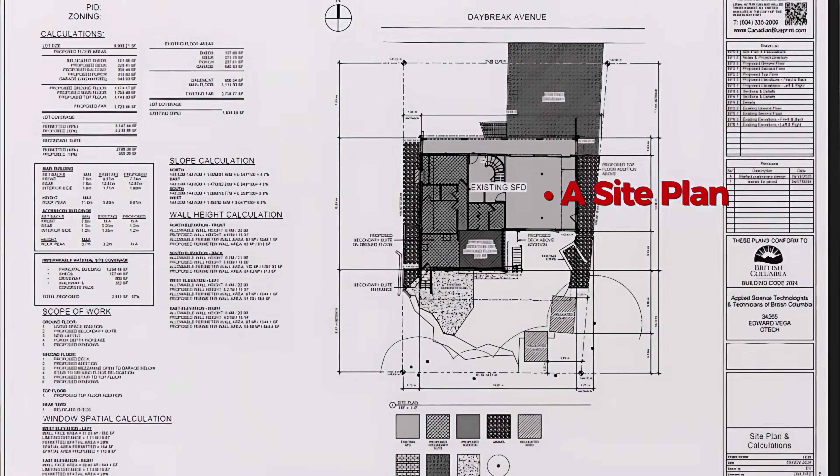A question you may often have is what happens behind the scenes. We'll review the original drawings, which include important details like a site plan, which gives us your current setback, building calculations, which let us know your home's lot coverage and square footage.

Please note that the maximum allowable square footage of today may not be the one that was approved back in the day. Therefore, if you're planning to add some square footage based on the previous calculation, that may not always be possible. Next, we'll review the land title.

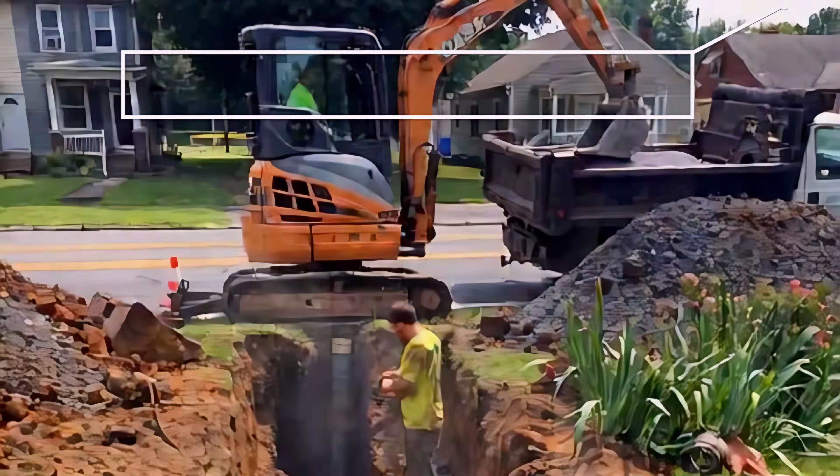This gives us details such as if your property has a right-of-way or covenants. To explain what a right-of-way means, there may be a section in your property that even though the city recognizes it's your property, you may not be allowed to build over that area. Often a right-of-way is used to grant access to essential services like plumbing or utilities that the city may need to access in case of an emergency. So while it's your property, certain restrictions apply, and construction over these areas are typically prohibited.

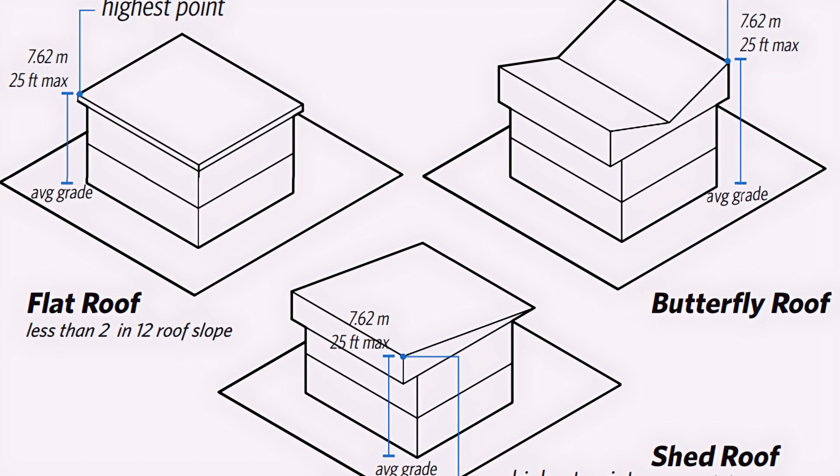A covenant is a legal agreement or restriction placed by the property owner or the city or another authority. It can limit how the land can be used or developed. For example, you may not be allowed to build over a certain height, specific architectural styles or materials may be required, or you may be restricted from subdividing the property.

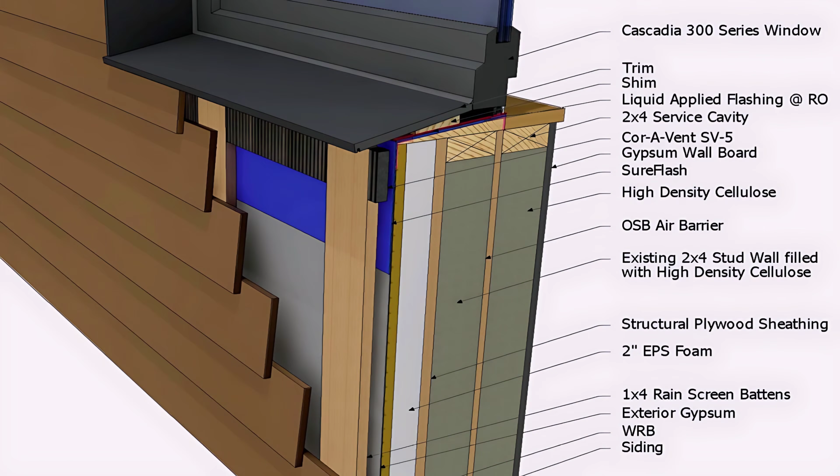Covenants are typically in place to protect aspects of the land or neighborhood, like environmental factors or preserving a specific aesthetic. Once we put all this information together, it helps us determine if the proposal would comply with local zoning bylaws. We also check against the BC Building Code to make sure that everything meets safety and construction standards.

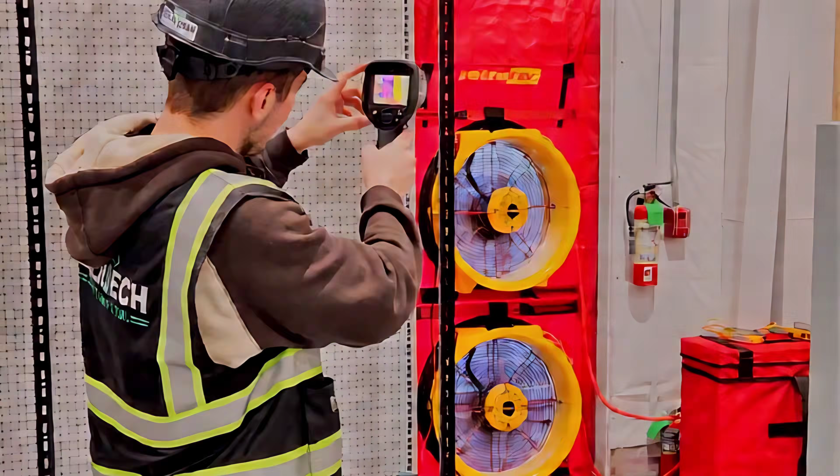We look at the construction assemblies for energy efficiency and fire separation. One interesting thing that I want to mention is the BC Energy Step Code, which came into effect by the end of 2018. This act requires you to bring on board an energy advisor to evaluate your project and make sure it meets the new energy efficiency standards.

In my experience, this often means upgrading things like wall assemblies, window types, and your mechanical system. This is to reduce your home energy consumption. This is very similar to what BC did with the BC carbon tax. Just as BC wants to get rid of gas due to its high carbon emissions, they also want to stop allowing homes to be built that waste too much energy because of poor design or workmanship.

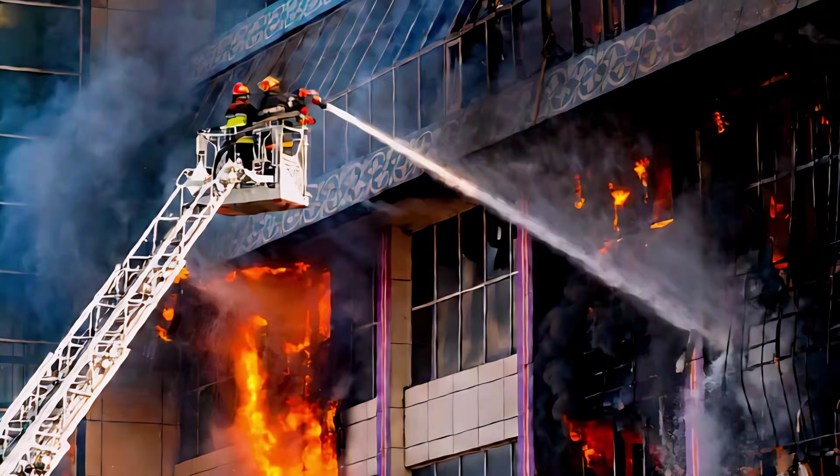When it comes to fire separations, this is a critical factor, especially when building a secondary suite. The suite needs to be fully fire separated from the rest of the home, as I've personally seen cases where unpermitted suites have led to severe fire damage. And here's the kicker: if you didn't pull a permit, the insurance company can void your coverage. That's a lesson no one wants to learn the hard way.

Now, on to the topic of fires, we look at spatial calculations, which is your permitted glass area on the sides of your home. If you have too much glass area on the sides of your home, not only is it a privacy concern to your neighbors, but the real reason it's important is because in the event of a fire, it ensures there's not too many glazed openings, which can help the fire spread to neighboring properties. And finally, we look at stairs.

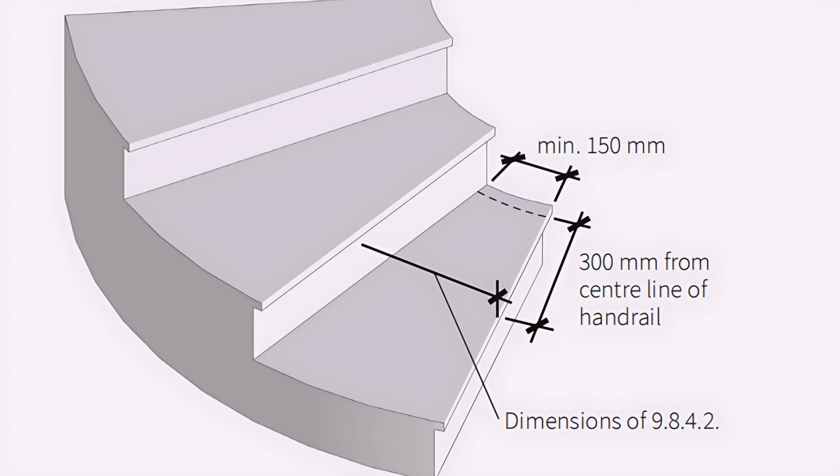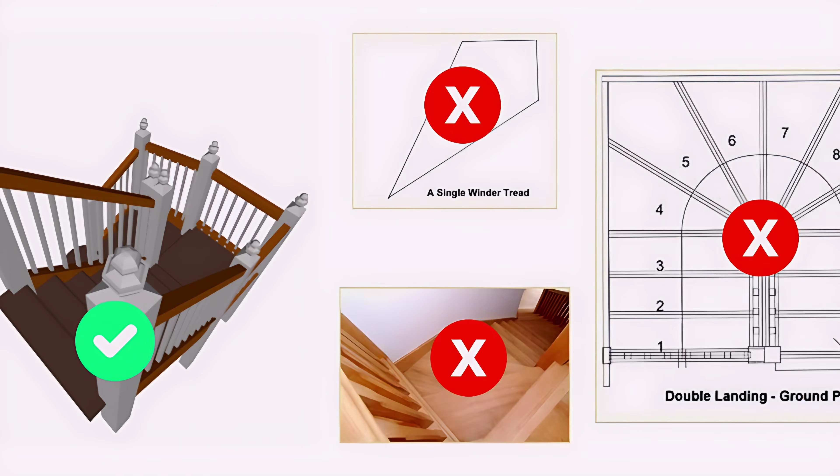We ensure the proposed stairs meet the rise and run, landings, and width meet code. We often see that our client sketches don't allow enough space for a staircase. Since the 2012 revision of the BC Code, winder-style staircases aren't permitted, which I personally think is a good idea, as I remember when I was a kid running up and down those stairs and often bailing. Fortunately, those stairs were carpeted.

Let's look at as-built measuring. As-built measuring is needed when the city has no original drawings of your home or business, or if there's been significant changes since the last building permit set of drawings. A significant change is anything that's hard to mark on an existing set of drawings.

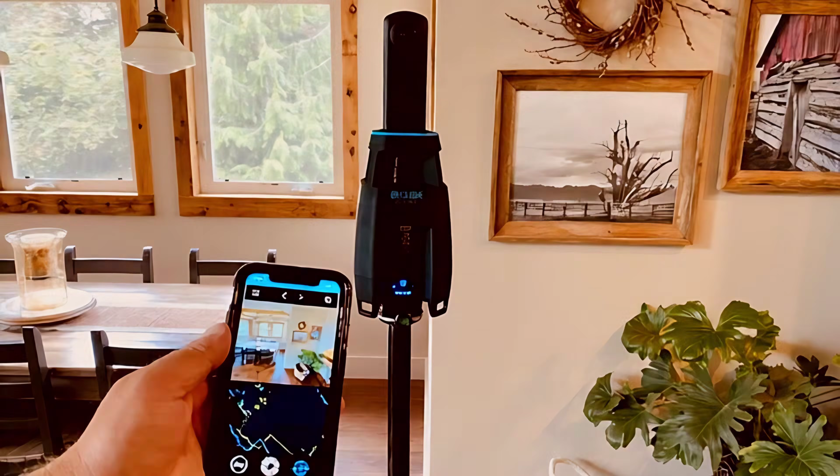We use a LiDAR scanner that takes 360-degree photos and scans the rooms. This method is efficient, reducing what used to take me 8 hours to do down to just 3. It also minimizes human error.

Please note, as-built measuring is different from a land survey. While we focus on the interior of the building, a certified land surveyor handles the exterior. The surveyor will measure the property's boundaries, grades, and in case of a renovation, the exact location of the house in relation to the lot.

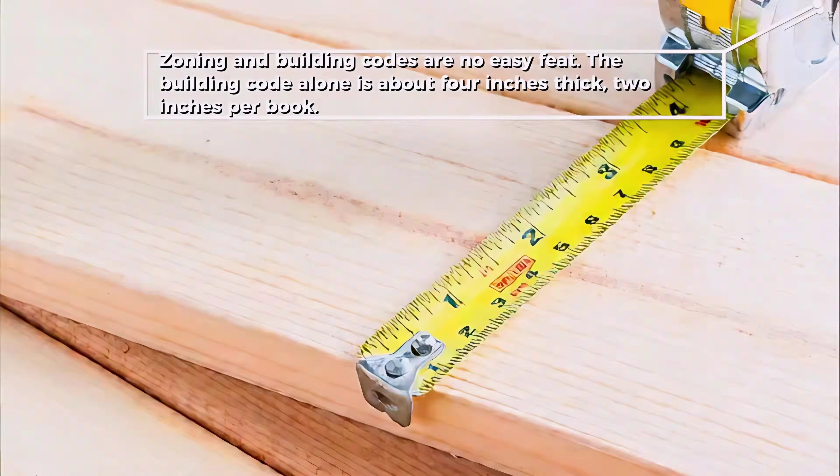By now, you know zoning and building codes are not an easy feat. The building code alone is 2 binders, 4 inches thick, but if you ask a carpenter, he's going to say it's only 3.5. Don't try to tackle this on your own. Leave it to the experts.

We offer a feasibility study for every project because each one is unique and needs a tailored approach. Whether you're a homeowner, business owner, or contractor, we're here to make sure your project runs smoothly from start to finish. Now let's conclude the presentation with 5 frequently asked questions.

1. Do I need an architect? In most cases for residential renovations or custom homes, you don't need an architect. Unless your proposal has more than 5 dwellings, or TIs, sometimes as dictated by the Architectural Institute of British Columbia, which is covered earlier in this video.

2. Can a designer request the original drawings on my behalf? Yes, but the designer needs to prove that they have authorization from the owner.

3. Can the designer apply for the permit on my behalf? Yes, but the designer needs to be listed as the agent for your project, which means they will be responsible for all inspections and outcomes throughout the entire process. For both legal and practical reasons, it's usually better for the owner or contractor to apply for the building permit, as they're involved in the project from start to finish.